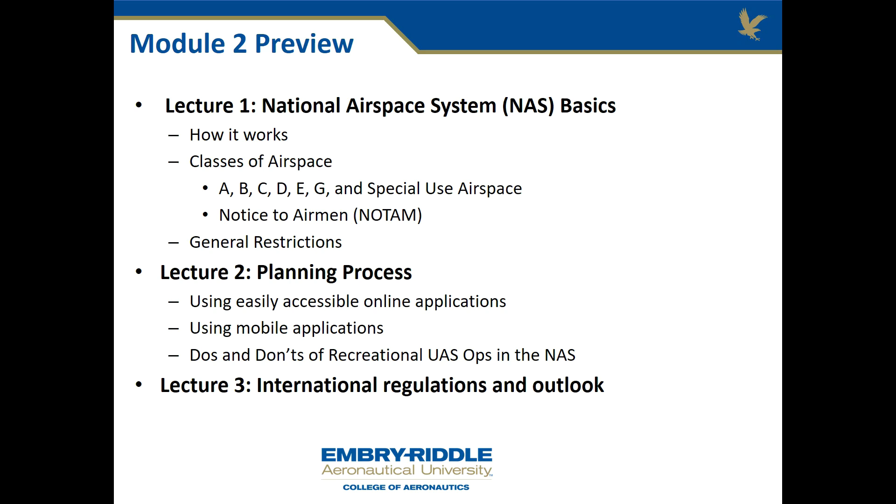First, take a look at how the NAS works. There's a very good and short Federal Aviation Administration video on that topic. Let's have a look.

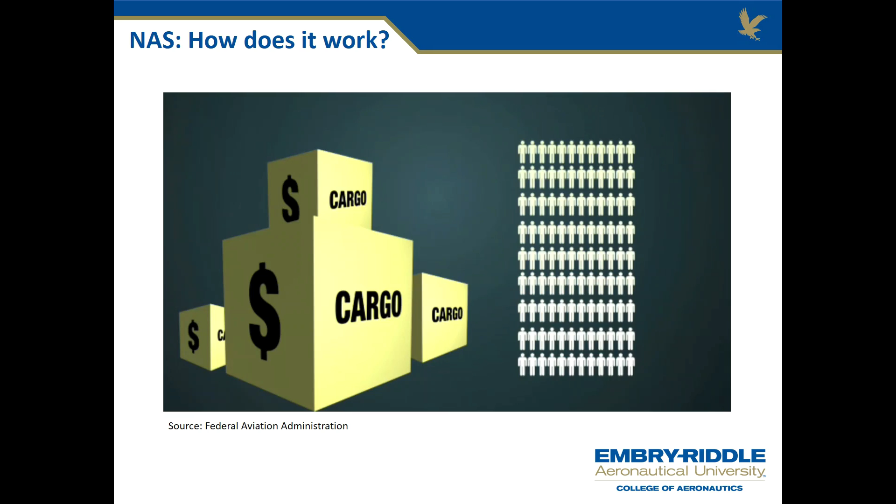The FAA's mission is to provide the safest, most efficient aerospace system in the world. To do that, the FAA controls thousands of planes in the air at once, moving hundreds of millions of passengers a year. Add in billions of dollars in air cargo and hundreds of thousands of private pilots, and you have a big challenge. Here's how it's handled.

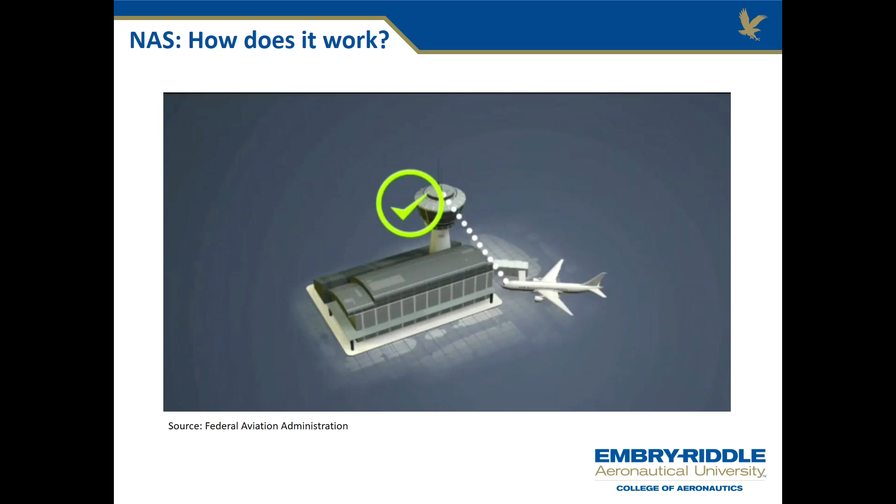As passengers board a plane, the pilot files a flight plan with an air traffic controller and gets weather information. The plane won't taxi until a ground controller, keeping track of planes all over the airport, okays it. Delta 2412, push approved, advise taxi.

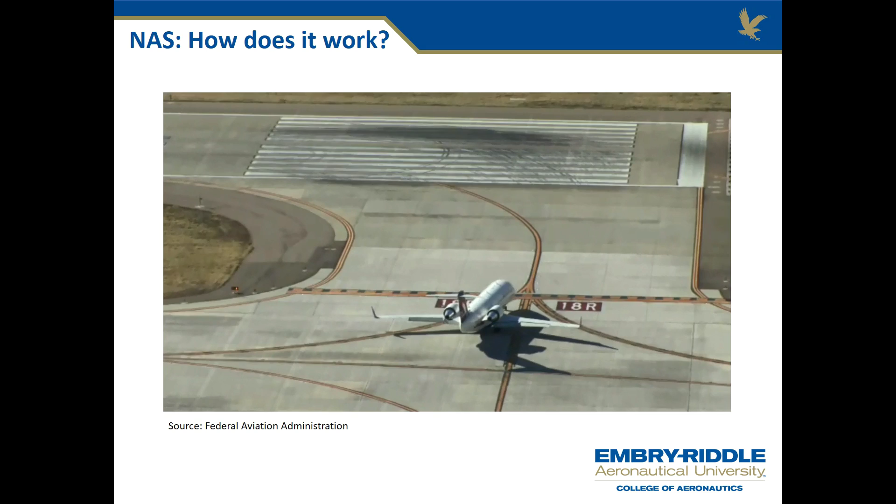That controller will direct the plane along taxiways to the runway, where a local controller, also in the tower, takes over. The local controller will safely guide the plane through takeoff and over a set course just beyond the airport's boundaries, where a TRACON controller takes over.

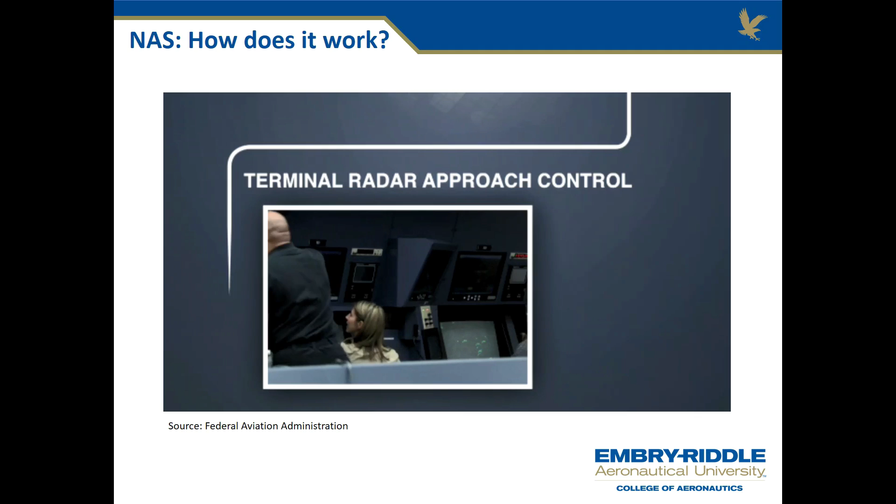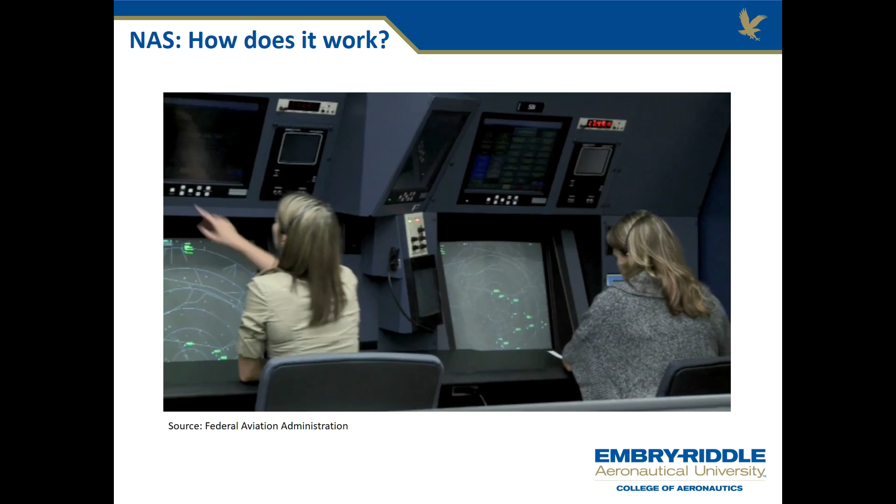The Terminal Radar Approach Control, or TRACON, may be at an airport or at another location that manages the approach and departure for many airports. Unlike tower controllers, TRACON controllers work exclusively from radar and have no windows to see planes, which could be more than 100 miles away. These controllers keep planes separated within about 50 miles of an airport's airspace at altitudes up to 17,000 feet. Beyond that, en route controllers manage the flights.

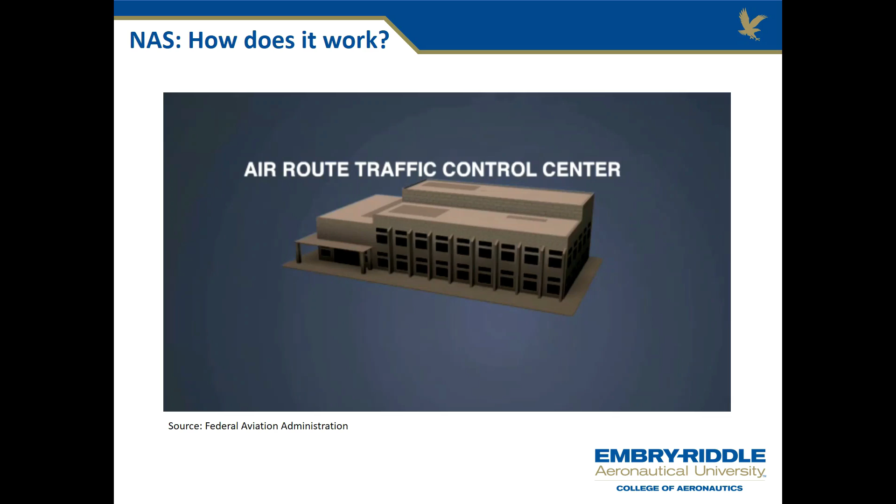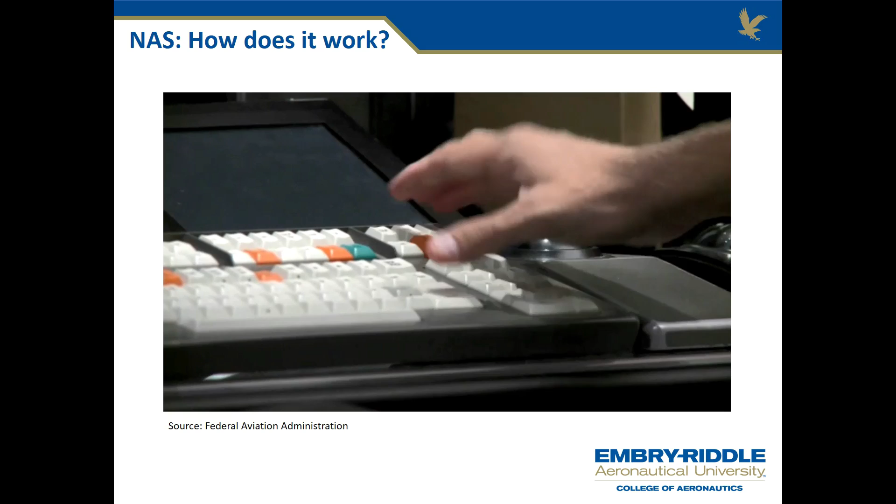En route controllers work at one of 21 air route traffic control centers across the country. Each en route center is responsible for defined areas of airspace with multiple sectors inside each center's airspace. Even though the sky seems boundless, teams of en route controllers keep planes flying in lines following fixed ground locations. Pilots stay fully advised as communications are handed off from controller to controller.

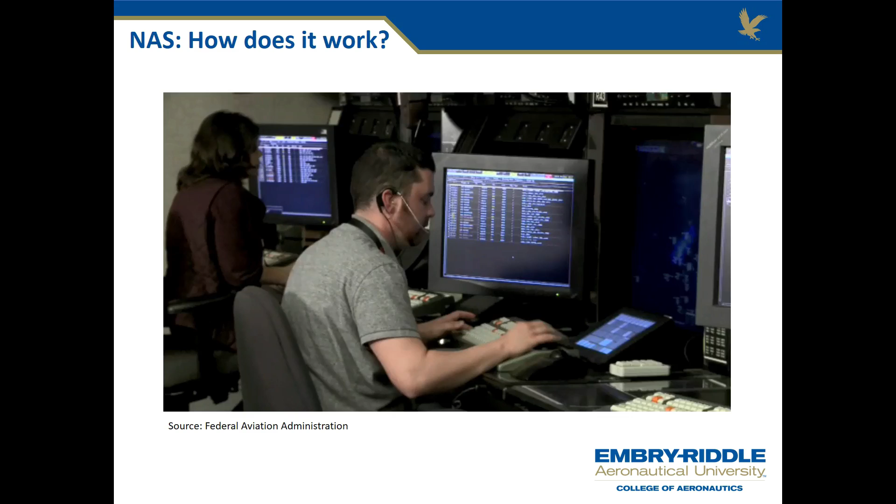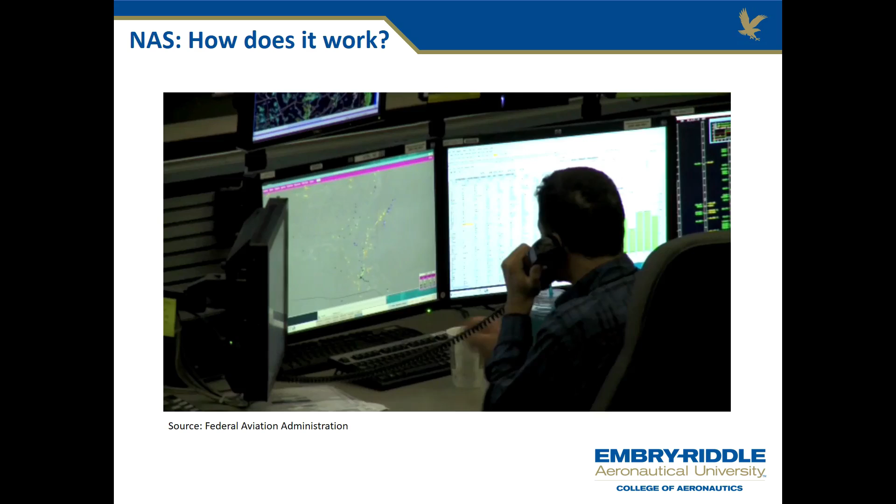As tower, TRACON, and en route controllers focus on planes, management teams help controllers at the Air Traffic Control System Command Center see the big picture. Command center controllers don't speak directly to pilots. Instead, they coordinate nationally with airlines, fellow controllers, the military, and other users of the airspace to keep things moving safely and efficiently.

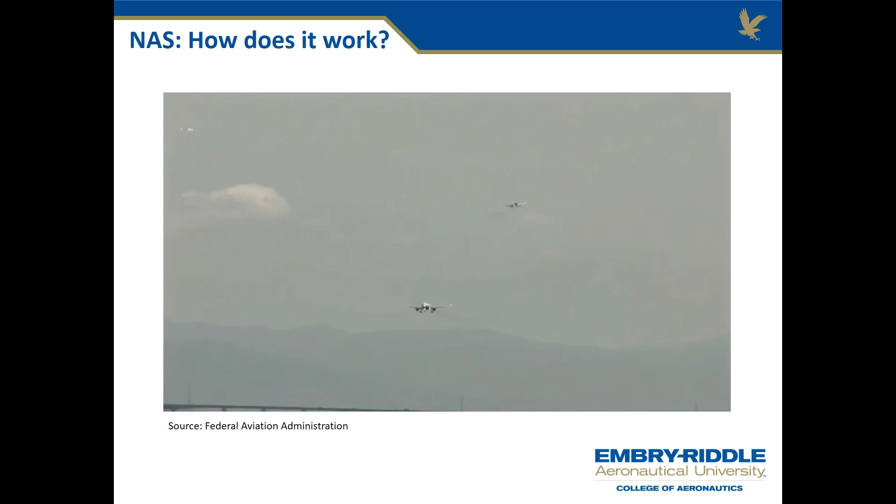As a plane descends, it will return to TRACON controllers, who steer it into line with other aircraft approaching the airport from different directions. The local tower controller takes over for the landing, and a ground controller guides the plane back to the gate. That's just a few of the more than 15,000 air traffic controllers keeping America's skies the safest and most efficient in the world.

Now we'll go ahead and move to the different types of airspace. There are two major types of airspace here in the United States and all over the world: controlled, with specific dimensions including horizontal and vertical boundaries, and uncontrolled, basically everything else. That uncontrolled area has restrictions and limitations in specific areas based on population and other factors. We're going to look at each of those controlled airspace types, and Class G airspace, which falls under uncontrolled airspace, and how they influence how you can operate as an sUAS operator.

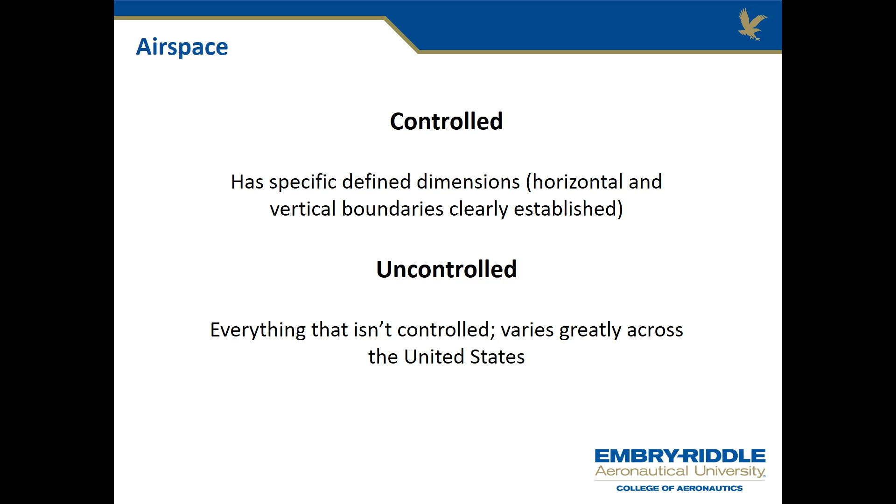In your optional reading for this module, you'll see a chart delivered by AOPA, the Aircraft Owners and Pilots Association, called Airspace at a Glance. This diagram is designed for pilots flying in, around and through such airspace, depending on the capability of the pilot and the aircraft. We'll take a different approach here, talking about these airspaces from a broader perspective, what they're used for, their limitations, and why you have to avoid them, specifically why the FAA requires no closer than 5 miles to an airport, airfield or heliport without previous coordination. Let's go ahead and get started with Class A.

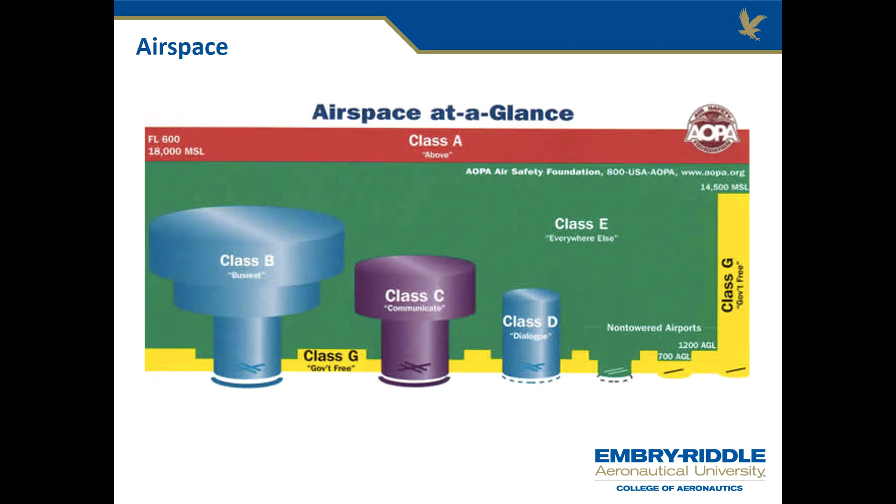Class A airspace is found 18,000 to 60,000 feet mean sea level, well above recreational or hobby users, which are mostly limited to 400 feet above ground level. All of the jet routes are in Class A airspace.

Class A airspace is primarily used by jets and airliners traveling over long distances between major cities. All flights in Class A are conducted under instrument flight rules, so pilots must hold an instrument rating and be on an active IFR flight plan. Pilots must obtain a clearance from ATC before entering Class A and maintain radio contact at all times. All aircraft must be equipped with an altitude encoding transponder to provide location and altitude data to ATC radar equipment. Don't confuse instrument flight rules with bad weather.

It means positive control. Class A airspace is an example of incredibly well-orchestrated positive control of aircraft and coordination across the country in the NAS. When you're flying a commercial airliner, chances are high you're above 18,000 feet and flying in Class A airspace. Again, this is not an issue for hobby or recreational users.

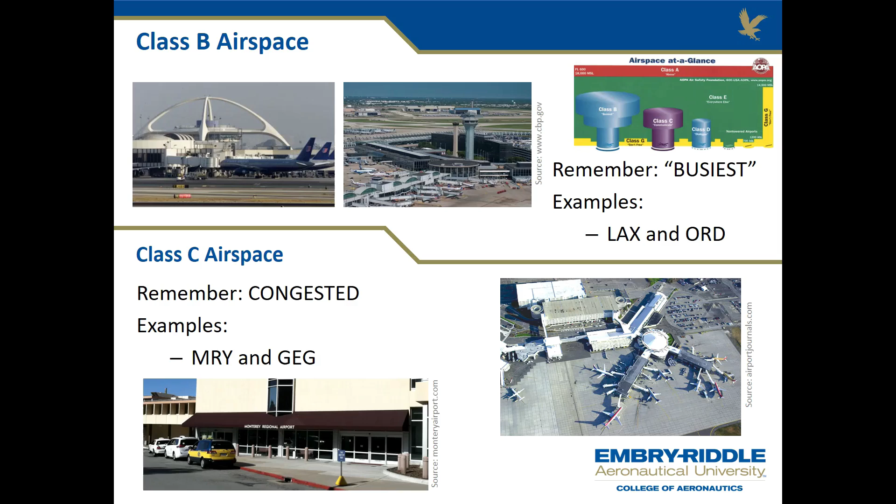Class B airspace is found around the busiest airports. LAX, Los Angeles, or Chicago O'Hare are examples of Class B airspace with crowded operations and constant flights in and out. Class C airspace includes congested airports, still with a lot of traffic, but much less than Class B. Monterey and Spokane International are examples of Class C airspace.

Class D airspace, or an easy way to remember, D for directed, are smaller airfields with a control tower but without the traffic load of Class C or Class B. Examples include Grant County International in Moses Lake, Washington, and Easton Newnan in Maryland. Here's an interesting twist: when a Class D control tower shuts down for the night, the airspace where the tower and airfield are located falls under Class E, Echo airspace.

That may sound confusing at first, but here's a way to remember it: think of Class E airspace as enclosure, and it encloses all airspace except Class A. So at night when the tower closes, Class D airspace goes away and that area is filled back in with Class E. When the tower opens again the next day, Class E in that area becomes Class D again. So remember, E for enclosure.

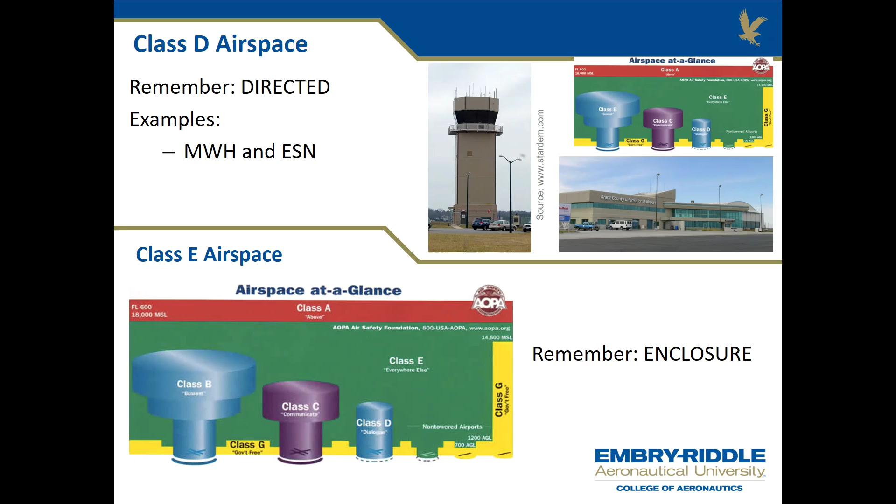Class G airspace is oftentimes good to go. It's the only uncontrolled airspace in the national airspace system. That doesn't mean you can do whatever you want, it just means you're on your own when flying. Some call it the Wild West of airspace, where you can fly and be left alone without talking to anybody. You just need to follow basic rules of visual distances to clouds and other aircraft, also known as see and avoid, and you're good to go.

Special use airspace includes a lot of restricted airspace around the country. Types of special use airspace include prohibited areas, restricted areas, warning areas, military operation areas, alert areas, and controlled firing areas. For example, the graphic on the left shows the Boardman military operating area and the restricted area where you are not allowed to fly. To the right is a general graphic provided by the Air Force of their R2508 complex at Edwards Air Force Base, also a restricted area.

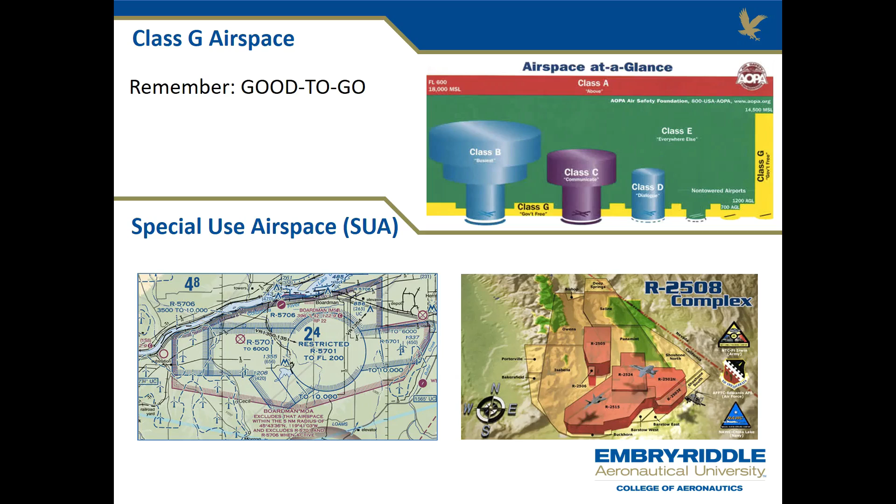If you are a certificated pilot with a good understanding of restricted airspace, you will know when restricted airspace can be flown under, because the altitude may not go all the way to the surface for the restriction. But if you are not a certificated pilot and not familiar with reading restricted area graphics, it's best to avoid them completely and check with a pilot or local airport operator to determine the reality, so you have a better understanding of what you can and can't do. As a rule of thumb, restricted area is a no-go.

On top of this is what we call NOTAM, which stands for Notice to Airmen, and TFR, which stands for Temporary Flight Restrictions. NOTAM is very important because it gives you notice containing information not available in advance through other publications. In other words, these are advisories that update you with something that isn't on the map, chart, or in a booklet printed months or even years ago.

It's important to look at NOTAMs because a special kind of NOTAM is a TFR. TFRs tell you where you can't fly at all and the reason for that restriction. For example, you might have a hazardous condition, a special event, the president in town, or an entire area that needs to be shut down. The TFR will tell you that, and you'll find it under your NOTAM alerts.

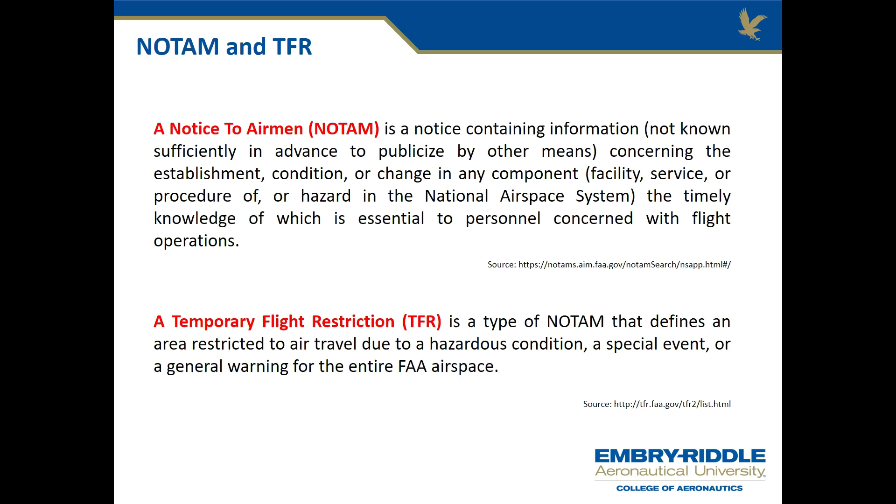At this stage, you may realize that restrictions, no-goes, and confinements that can influence or prevent your SUAS operation, whether commercial or private, can come from the airspace situation and from the ground status. So if you ask, can I fly here or there? There are many types of airspace and ground-related restrictions in the United States. As you've learned, restrictions that commonly affect SUAS flights can be restricted airspace or temporary flight restrictions, but we also need to talk about other conditions and restrictions.

For example, stadiums, sporting events, and wildfires. The rules for stadiums and sporting events are that flying SUAS in and around stadiums is prohibited starting 1 hour before and ending 1 hour after the scheduled event, and for that entire time it's prohibited within a radius of 3 nautical miles of the stadium or venue.

Wildfires: it's illegal to fly your SUAS in or around a wildfire, especially a wildfire firefighting operation. Depending on the environment and legal system, there can also be restrictions involving land ownership, national parks, hospitals, power plants, schools, or prisons. All of these restrictions can be static, like for a prison, or dynamic, like for a VIP visit or a major event.

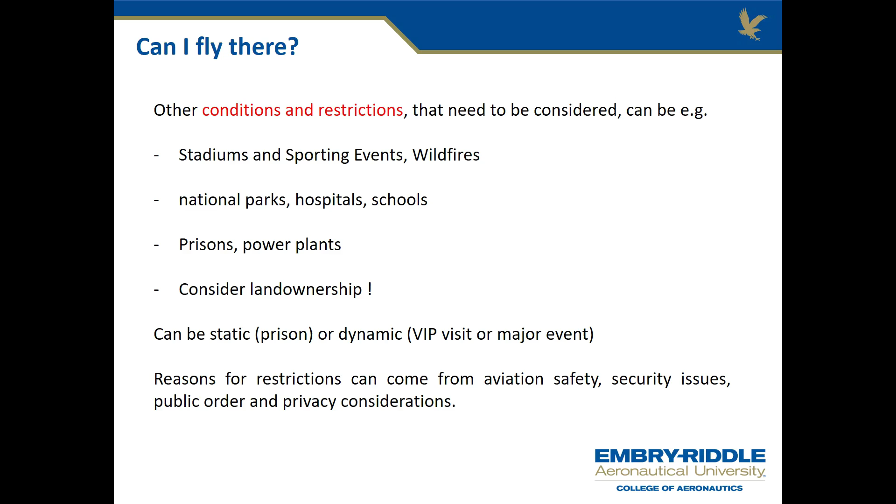In this lecture, you learned about airspace classes in the National Airspace System and how they relate to an unmanned aircraft system. You also learned about many restrictions important to consider when operating SUAS. We concentrated on the NAS in the United States. If you're taking this massive open online course from a country outside the United States, there will be many similarities and also differences. Now join me for lecture 2 to go one step further toward safe SUAS operation.